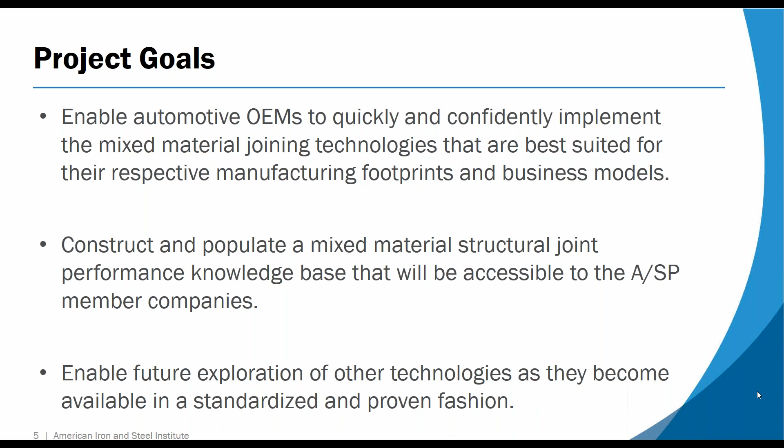This was a two-phase project, and the results I'm presenting today are from the second phase. The first phase was to generate a short list of technologies to study, and we did that by generating a matrix of test conditions. This was put together by our OEM members and intended to represent a joint either between a roof and a body in white or a body side and a body in white. We came up with a number of gauge and grade selections, and then for each stack we replaced the bake hardenable steel class A surface with an aluminum sheet, and we filled the matrix with all of the currently known joining technologies and a variety of test types, primarily a lap shear and a cross tension, and configured in 2 thickness and 3 thickness with and without structural adhesives.

We then did quasi-static testing on all of these joints to establish, relatively speaking, how strong they were compared to a baseline resistance spot weld. Doing that let us filter down to 3 technologies to carry on into phase 2.

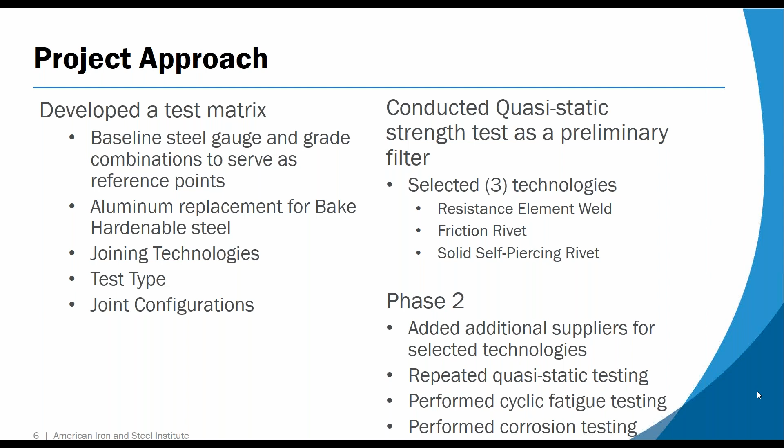I'll speak more about these technologies in a moment, but we settled on resistance element welding, friction riveting, and solid self-piercing rivets. Going into phase 2, we took those 3 technologies, and for 2 of them, we added a second supplier so we could compare variations within the technology. Then we repeated the quasi-static testing to both include the new supplier's products as well as check the calibration on our existing suppliers. Then we took all of them through both a cyclic fatigue test and a corrosion test to finish the evaluation.

Because these joining methods are coming from joining suppliers with various trade names, we didn't want to be endorsing any particular supplier or trade name as part of this project. So we have adopted some generic terminology, which I will use throughout this presentation. I think you are all sufficiently familiar with resistance spot welding, so I'm not going to dwell on that.

The three technologies that we are studying specifically are a solid self-piercing rivet, which is, much like it sounds, a rivet that punches through the stack of 2 or 3 materials, ejecting slugs out the bottom side, and is then upset to form a mechanical joint. It's essentially a cold rivet that makes its own holes.

The second technology is a friction rivet, which is a rotary process that spins up a steel joining element to enough speed and temperature that it's able to plasticize the top aluminum layer, push the aluminum out of the way, and then friction weld to the second layer. Because this is a friction weld and essentially a surface solid state joint, it only works on 2 thickness joints, which you'll see in the later tables.

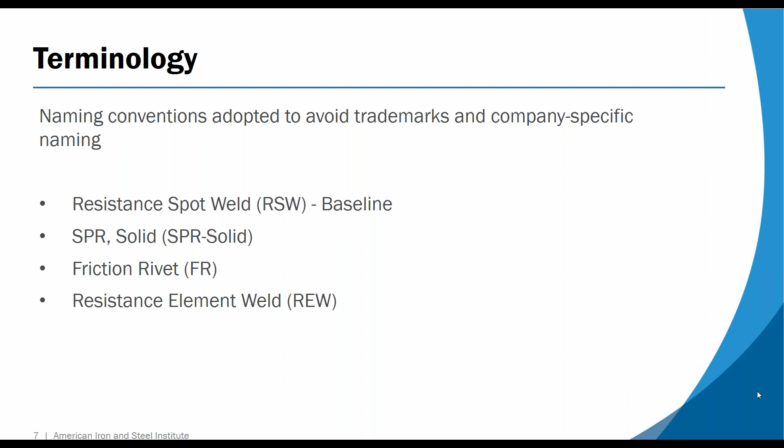And then finally, we studied resistance element welds. This is again a steel joining element that is punched through the aluminum sheet, mechanically clinched or fastened into place by interlocking, and then is resistance welded to the underlying steel sheets by either a resistance spot weld or projection weld, depending on the geometry of the particular element.

For phase 2, we concentrated on the lap shear coupons because they were most suitable for the cyclic fatigue testing that we went through. As you can see, we used a 45 by 105 coupon for these.

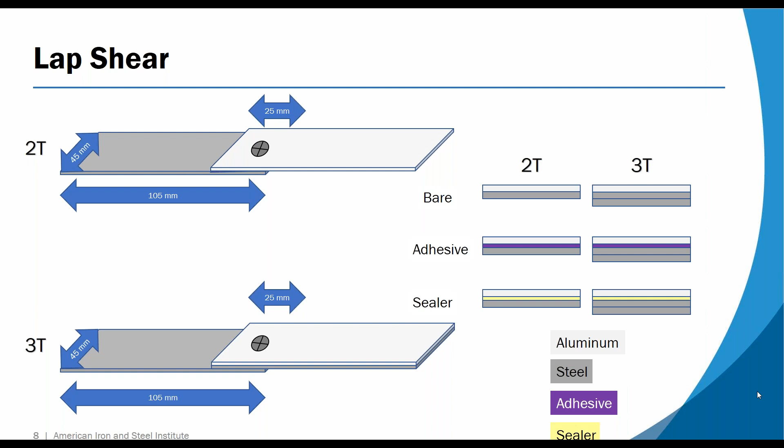But I mainly want to direct your attention to the 3 thickness joint configuration and the way that we applied the adhesive or sealers. In each case, we applied a structural adhesive or a non-structural sealer between the aluminum top sheet and the steel mid sheet. That was because of considerations for galvanic corrosion, and that is important in our 3 thickness joints because in the 3 thickness joints, we actually pulled the top sheet and mid sheet together. That means that for the strength performance of the joint, they do not benefit in any way from the adhesive or sealer. We're actually using them more as a noise factor to understand how well the joining method works to join the 2 steel layers with an aluminum layer on top, and how much the adhesive might be a detriment to the process.

Here are some selections from our baseline joints. In each case, for all of our 6 joints, we constructed resistance spot weld baselines and used them to set our performance goals. In the upper left-hand corner, you will see a 2 thickness joint without any kind of sealer or adhesive, and that's a pretty classic spot weld nugget that you can see.

The upper right is the same joint, but with a structural adhesive added, and you can see the failure mode there is moved into the top sheet because the combination of structural adhesive plus resistance spot weld was stronger than the top sheet was. And in the bottom, you see a 3 thickness joint with, again, a fairly classic weld nugget pull failure mode.

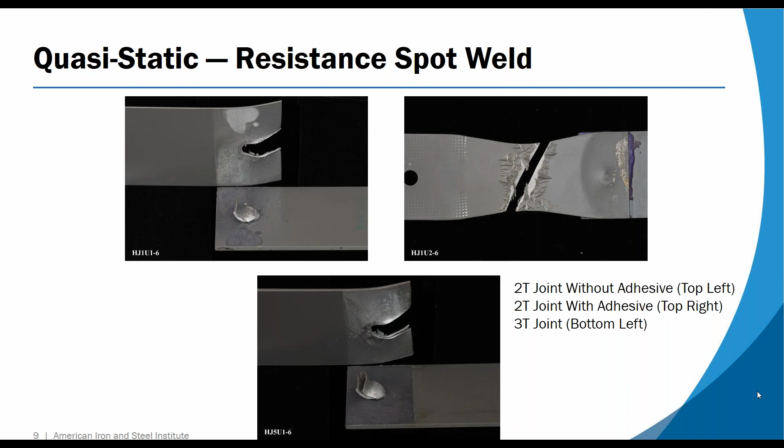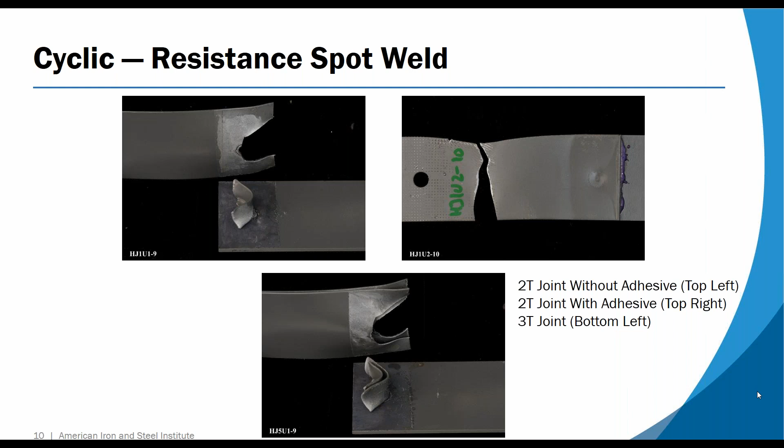These are the same 3 joints, but they're tested in cyclic fatigue instead of quasi-static pull. The failure modes remain essentially the same, but you can see from the shape they exhibit more of a brittle failure behavior, which is typical for cyclic fatigue. So again, we are pulling a nugget on the 2T, we are failing the top sheet on the 2T with adhesive, and we are pulling a nugget on the 3 thickness.

This is our first mixed material joint, and this is the solid self-piercing rivet, as I described before. These are the same 3 joints that I showed before, but in each case, the top sheet of 0.7 millimeter bake hardened steel is replaced by 1.2 millimeters of 6000 series aluminum. In the upper left, it's a 2-thickness joint, but we have added a non-structural sealer to mitigate galvanic corrosion.

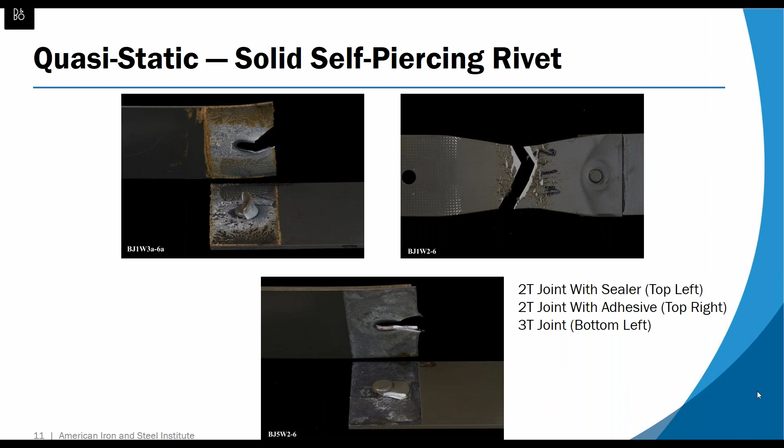You can see the failure mode is very similar to the resistant spot weld. The top right is the same joint with a structural adhesive, and the failure mode, again, is in the top sheet. And the bottom is the 3-thickness joint without adhesive, and the failure mode pulls through the top 2 sheets more or less the way it did in the resistance spot weld.

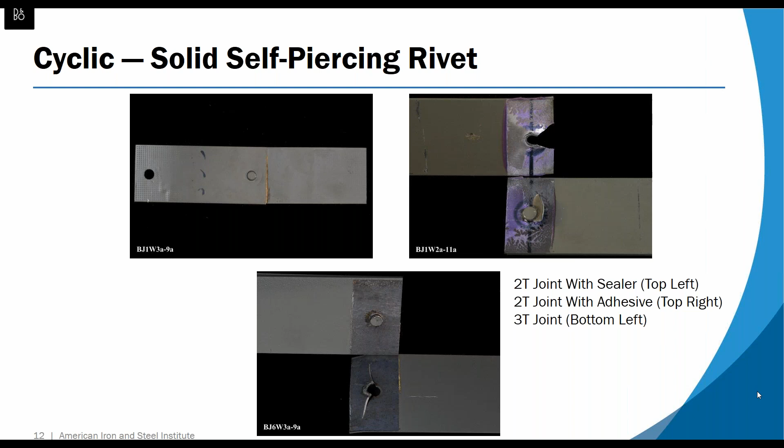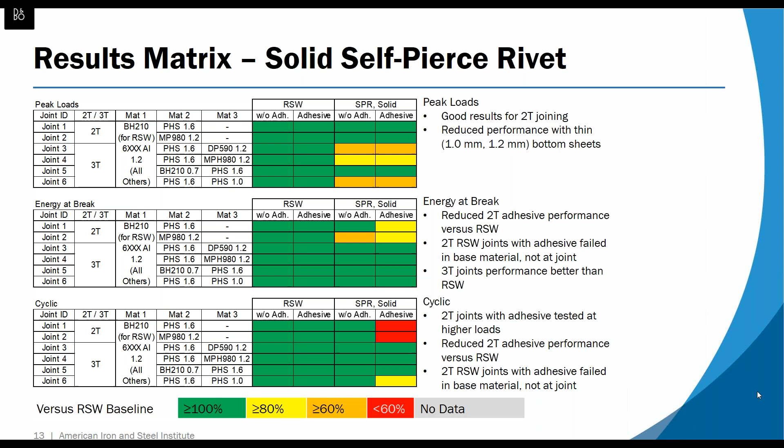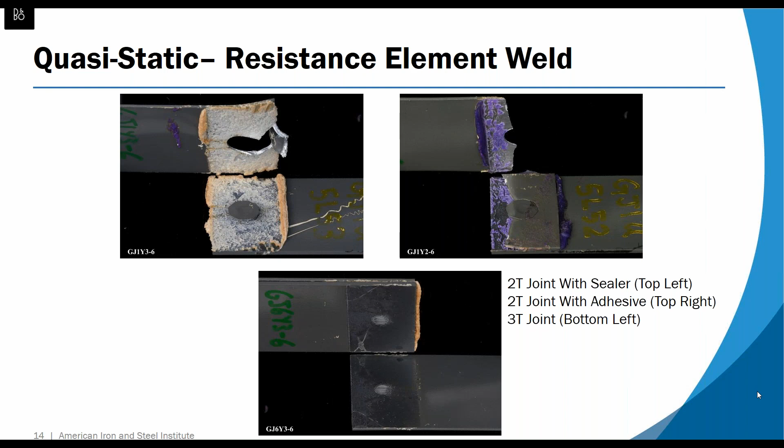In the upper right, with structural adhesive, we actually see a failure at the interface to the joining element rather than in the top sheet, because there's a stress riser there. And in the bottom sheet, the failure mode is a little different than the resistance spot weld baseline, because we are cracking through the weld surface instead of pulling a nugget out of the bottom surface.

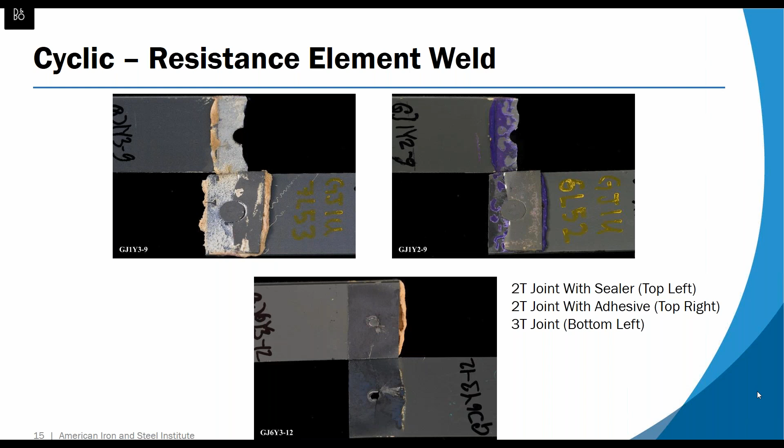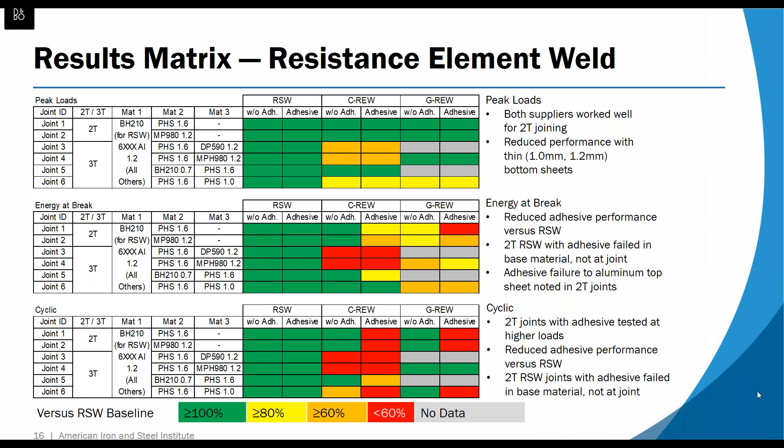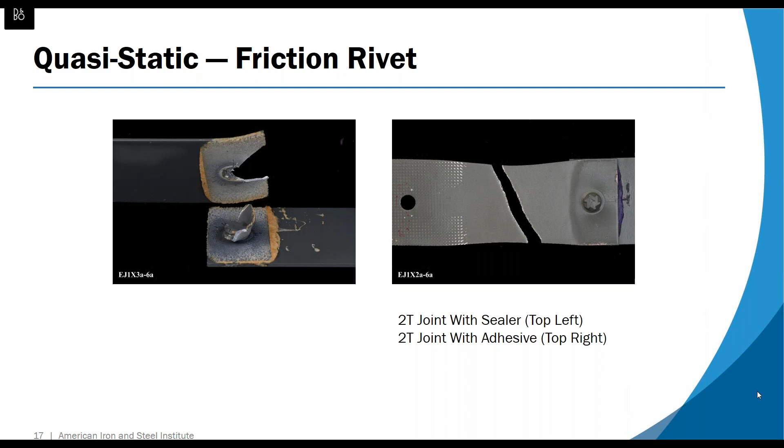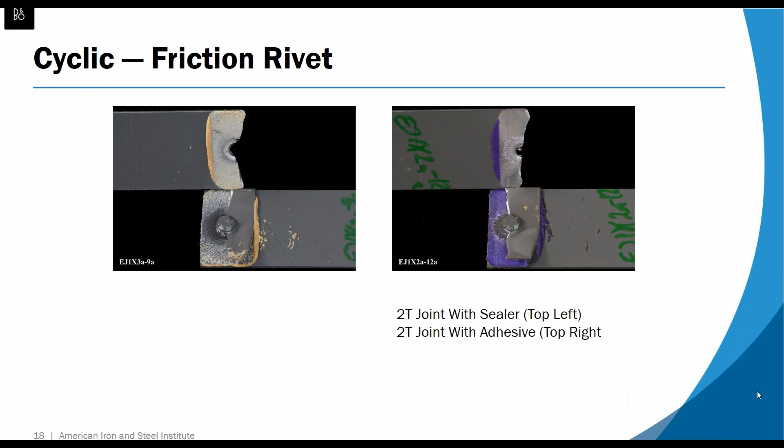In cyclic, and this is a typical theme we've seen with the mixed material, many of them cause a cyclic failure at the interface to the joining element because there's a stress riser there. And this is the tabulated data.

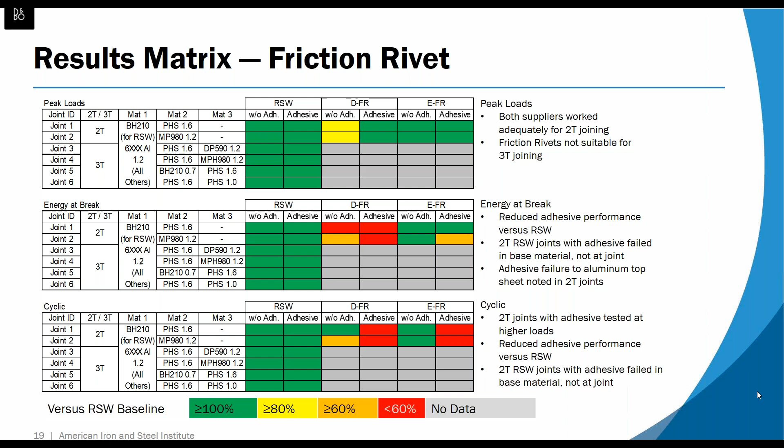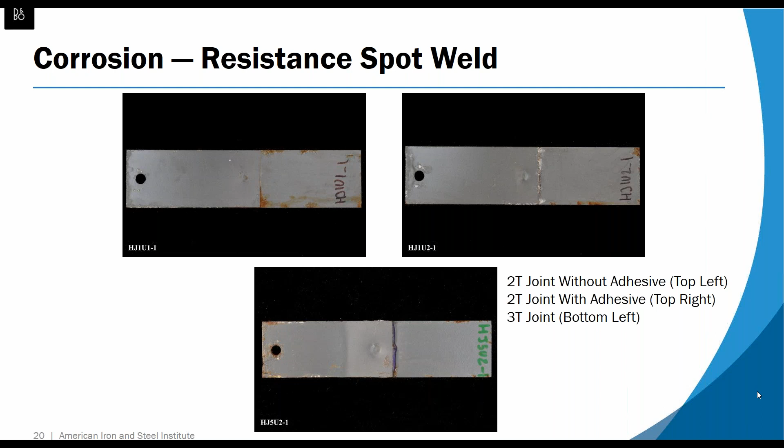We also took each of the configurations and ran them through cyclic corrosion testing in order to establish whether we had mitigated galvanic corrosion potential. These are the resistance spot weld baselines, and as one would expect, there is no significant corrosion issue with it.

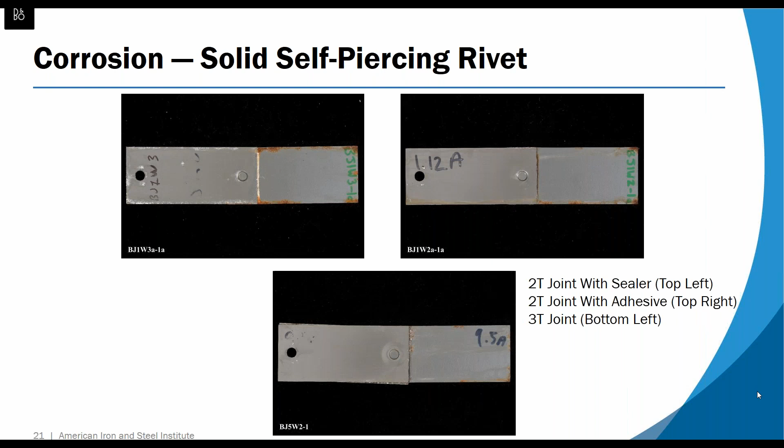This is the solid self-piercing rivet, so there's a little bit of cosmetic corrosion, a little white corrosion around the insert, but nothing significant structurally. These are resistance element welds. Again, you can see the outline where a little bit of white corrosion is coming up around the steel element, but there's no red rust or degradation to the joints.

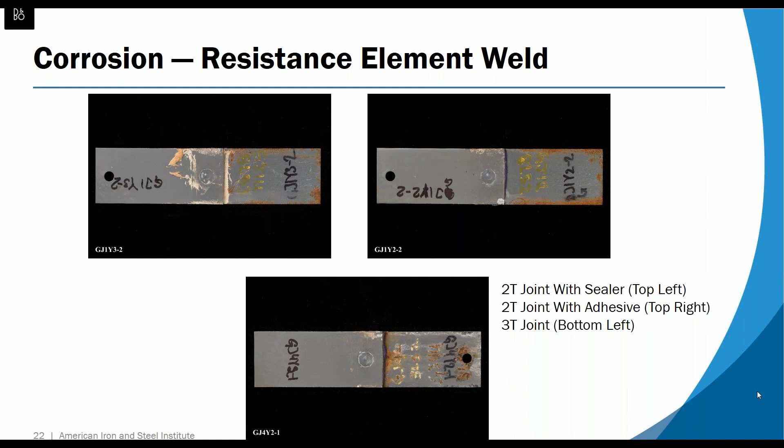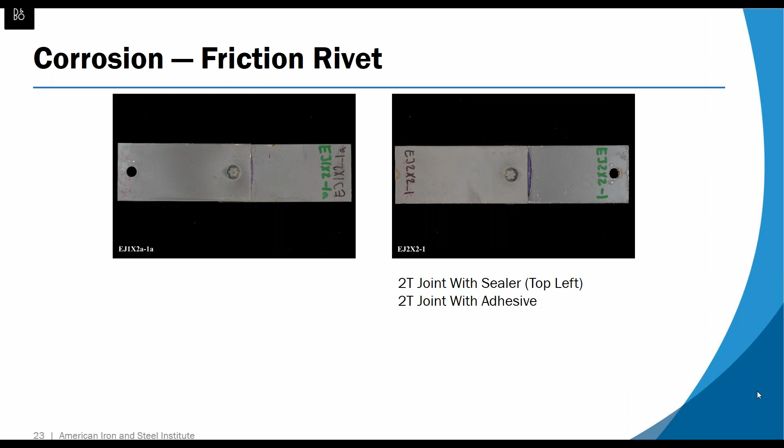And the friction rivet actually also shows no real effect from the corrosion testing. So all three of these mixed material joining methods can reasonably be said to have mitigated the galvanic corrosion concerns.

So our conclusion for this was, first, from a two thickness standpoint, all three of the technologies performed adequately for our needs. For three thickness joining, both the resistance element welding and the solid self-piercing rivets worked, but there is a caveat that they are somewhat sensitive to the stack up, so the stack-ups will have to be validated for any given application. That's not really any different than resistance spot welding is, though.

An interesting outcome, as I mentioned, was that the solid self-piercing rivets were actually substantially higher in energy absorption than the resistance spot welding baseline. So that's led to some interesting avenues of research in some of our ongoing projects, which you'll probably hear about in next year's presentations. Recommendations for going forward: I would like to study a little bit more how we can interact with the adhesives.

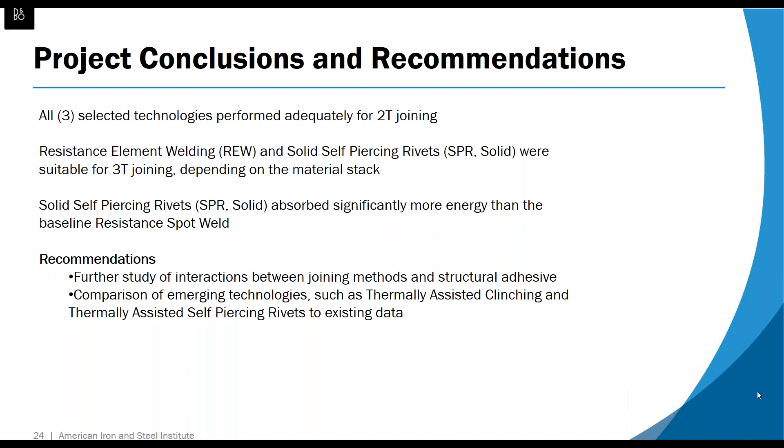We found that the mixed material methods did not work as well in the adhesive joints as the resistance spot weld did, so it would be advantageous if we could find a more optimal way to make the mixed material and adhesive play nicely together. There are also some emerging technologies that were not far enough along when we started this project but have gotten further since, such as thermally assisted clinching and thermally assisted self-piercing riveting, that I would like to see tested as well and added to our database.